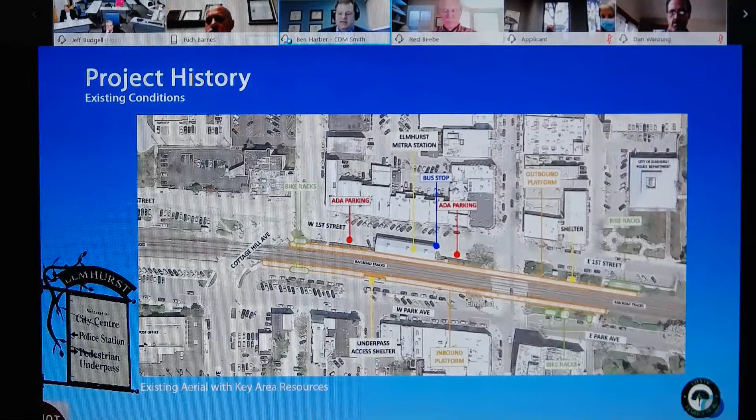Just to orientate everyone, the main inbound station that takes you into the city is the station house that everyone thinks about. There's a small pedestrian underpass that's not accessible to those with disabilities - it just has stairs. This is the location of the platform, which extends across York Street. As I mentioned, it's a very tight space, and the city over the years has tried to put as much parking as possible for commuters.

What also freed up some opportunities that I'll get into was the parking garage investments that the city has undertaken in the downtown, again over the last 30 years. That has actually created some opportunities to take a look at potentially creating more access to the site, working through some of the vehicle circulation and pedestrian circulation.

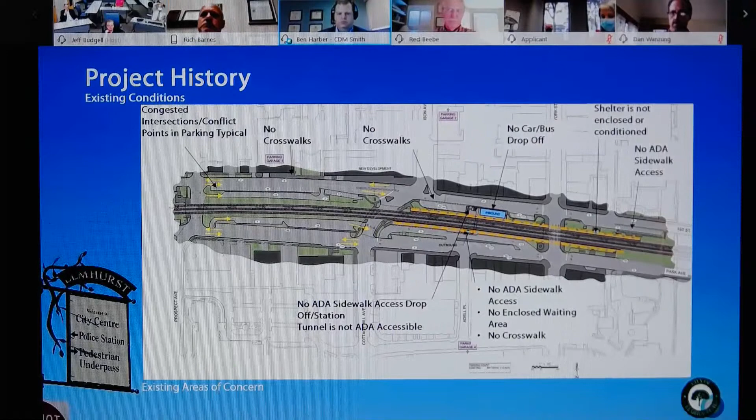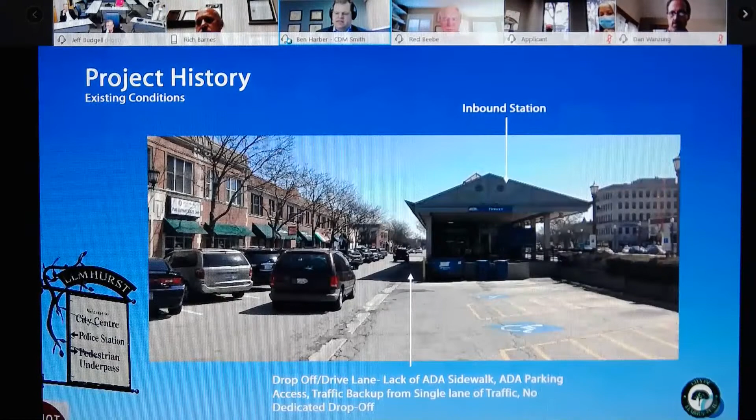Just a quick reminder, some of these images, when I saved it down, dropped a little bit of resolution - I apologize, but I think you're familiar with this. This is looking east at the main inbound station. Right now, there's not even enough space for an accessible sidewalk. And for the ADA parking spaces, there's no sidewalk, so when you get out of your car, you basically have to walk in the path of traffic to go to the station. It's just a very tight site, which is not atypical for the time the station was built.

Just a reminder, with Robert Palmer Drive, most of the vehicular traffic flow is not impeded by Union Pacific and Metra trains. But one of the biggest issues, obviously, is commuters and people using the streets just trying to connect the north and south sides of the street. So that was another issue that we wanted to address.

And then finally, on the south side, again, very similar situation. There's a lot of surface parking, people having to walk across, and there's no drop-off area. So if anyone decides to park and wait for someone here, there's no way to get around them. We've got very limited space on the south side as well.

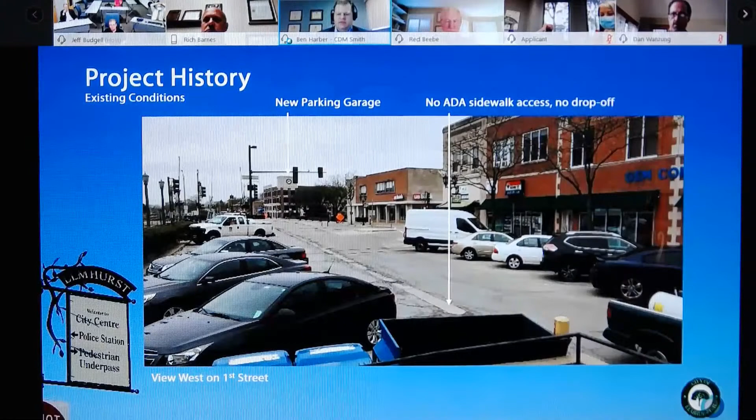As I mentioned, just a reminder that the platform extends through York Street, which is not the best condition. And we did take a look at trying to consolidate the platform either to the east or the west - I'll get into that in a moment. And just for reference, you can see how close the parking garage is, and we've got several others that are just to the north as well and the south.

In terms of the existing condition, and I think Corey and Public Works are probably more familiar than anyone else with this, that existing underpass, besides not being ADA accessible, floods on occasion. There's issues just in terms of visibility down there as well. It's very tight quarters. The existing station, a lot of the mechanical ventilation and air conditioning systems are past their useful life, and the structure was designed as a very utilitarian structure, but that's about it.

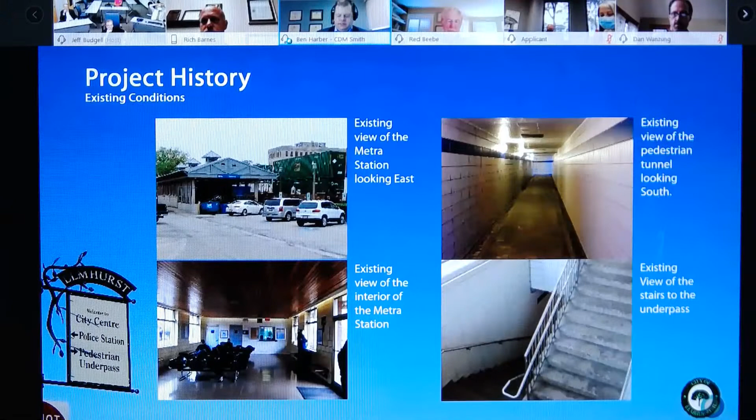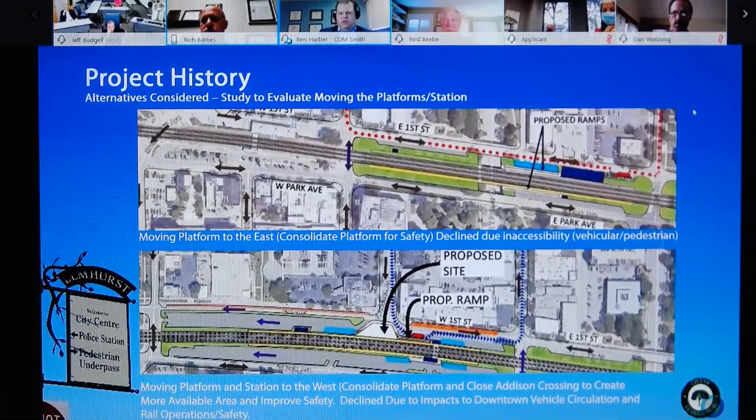Just quickly, systems of the building again date back to the 1960s, just like a house in desperate need of repair. And again, I'm sorry for the pixelation, but just wanted to show, we did look at moving the platform, for example, to the east, just as an exercise. This is York Street. And obviously, just to prove out that if we did that and moved the station further east, it would not be near the downtown business district. There'd be a lot of issues with bringing drop-off and more circulation. It's not a very easily accessible spot.

We also looked at moving the platform to the west, consolidating the platform, potentially closing off the Addison and Cottage Hill intersection. But two issues, obviously, with that. For safety reasons, you do not want to build a platform into the curve, so we had that conversation with Metra and Union Pacific. And secondly, just from a downtown access and emergency service perspective, the determination was made by the city not to pursue this option.

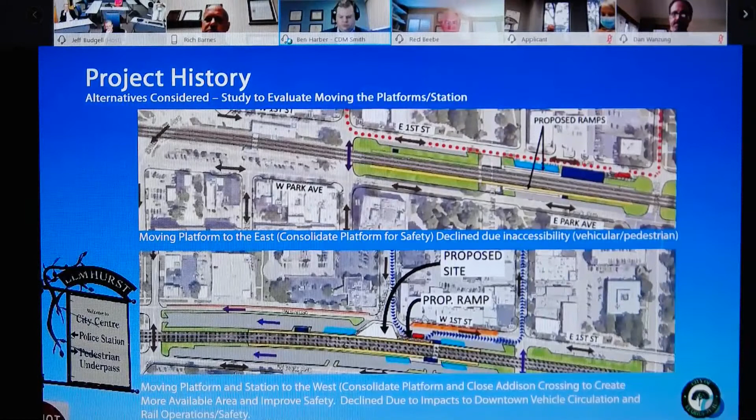The reason we wanted to go through that is it's actually a very tight space, and we can't really move things to the east and west. We just wanted to demonstrate that those parameters were really set in terms of where we could put the station.

Additionally, that mid-block underpass is really only used for commuters currently. There's no real benefit to those crossing on York.

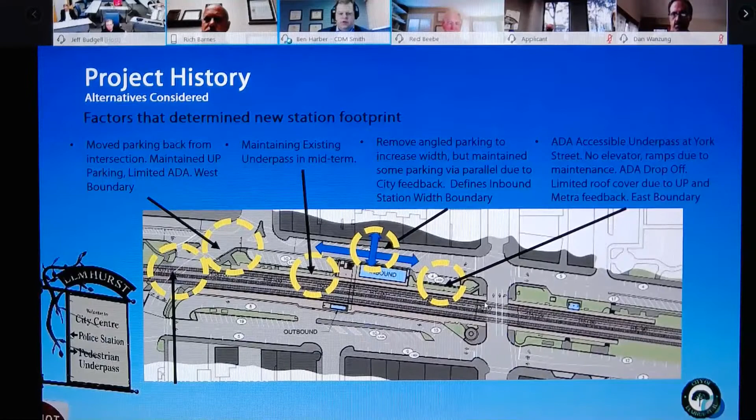So we did some quick sketches to take a look at what some of the massing could be, looking at if we put a ramp to a pedestrian underpass starting at York Street, or if we started it closer to Addison on the back end of the station.

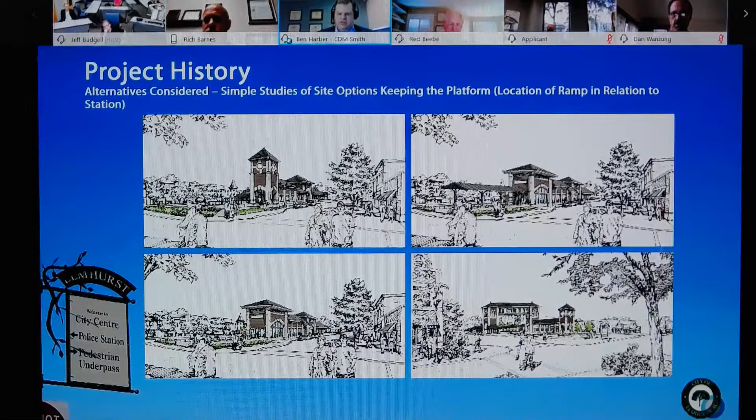We went through public comment along the way. We had several workshops with our staff at City Hall, meeting with the public. We had online surveys as well, presenting a lot of information, different alternatives, looking for feedback from commuters on how they use the station, their issues, etc.

Working with Public Works and other city staff, the determination was made that the best location for this new station would be in a very similar location, but slightly to the west. Then we'd put an ADA accessible ramp that would go from the station down to a new, wider 12-foot underpass, and be able to come up to a much larger outbound station.

We also looked at warming shelters, rearranging the parking from angled parking to some parallel parking to allow a Pace drop-off as well as for private vehicles. On the other side, we got rid of a lot of that surface parking to create a larger drop-off space and a larger plaza.

Again, it freed up a lot of real estate, getting rid of some of that paved area for more landscaped areas, allowing for more of a grandness that goes with the downtown, in our opinion.

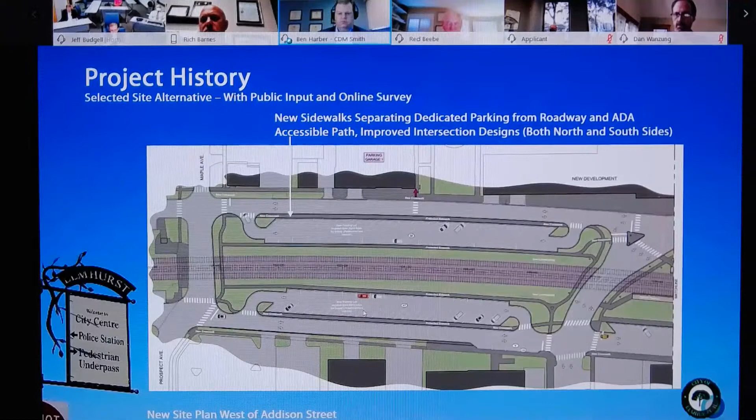Just wanted to give an example, or an enlargement, of what the downtown station would look like. This would increase the station by about 25% over its current size.

So we'd see a 24-hour waiting area, keeping a coffee shop or another vendor, and we'd have fully accessible functions. So instead of just having one unisex restroom, we'd have men, women, etc., keeping the ticket office in a larger waiting area.

On the opposite side, knowing that because of Union Pacific and Metra's operations there are many times, especially on weekends, where trains get flipped from one side to the other, we would also have a main waiting area typically on the outbound side.

The point of this is that the floor plan in relation to the ramp, because of the ramp slope for accessibility, means we have very limited space between York Street and the station building. We probably only have about 10 feet to work with on the east side.

And on the west, we need to maintain some ADA parking and some storage, so with those, we're also confined. We're very confined on the west as well.

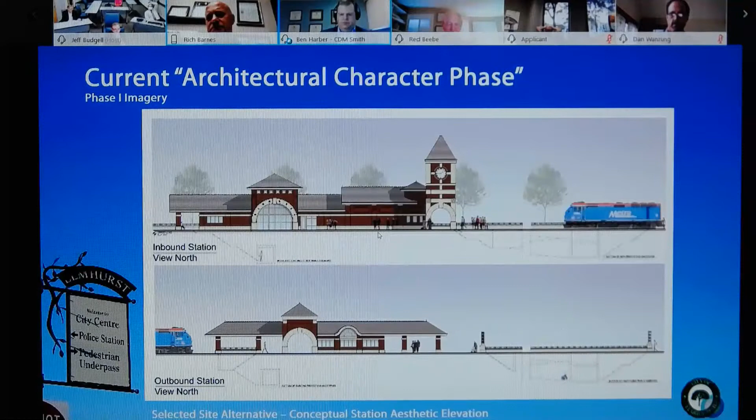This was something we had to take far enough that we could reach out for funding at the state and federal level, using some visualizations to explain that. So this is the image we used as we wrapped up phase one.

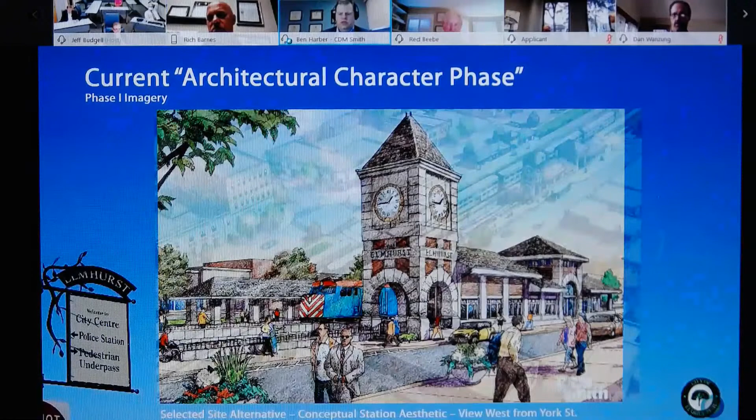And then just a diagram to show how that pedestrian underpass would look, and then the new station here, the other station on the other side, the ramp on the south side, the warming shelters, and that reworked parking.

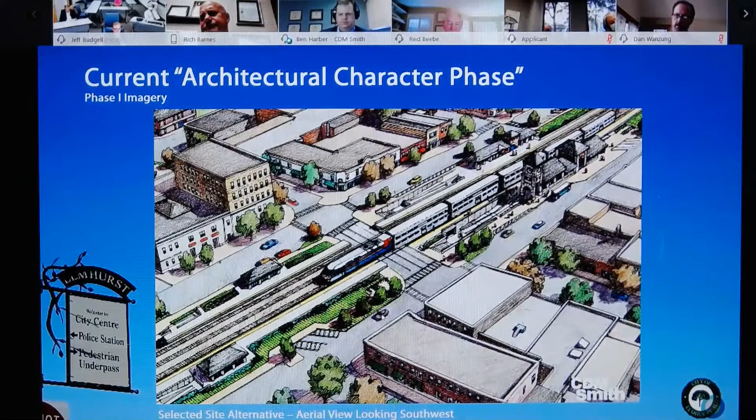Again, these are much nicer without the pixelation. But one of the things we wanted to talk about towards the end of phase one, and the city was concerned by, was that while we were showing these images for funding, the clock tower, for example.

There was a desire to engage the public even further in the second phase, and as the project got funding and moved forward into engineering, to reach out and figure out what this character would look like. So basically trying to keep the footprint of the building relatively in the same location, but really go through this exercise of different styles. What's appropriate for the downtown has changed a lot in the last 30 years.

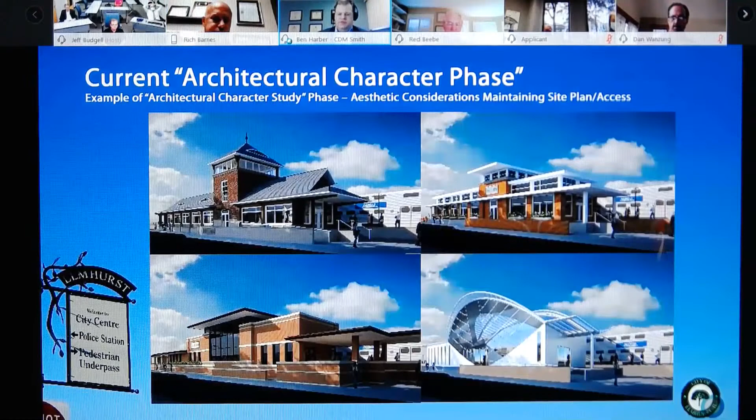During the course of the project there was a lot of development, and it continues to be a lot of development - the Opus project, for example, several condominium projects, and some commercial buildings as well. So there's quite a variety between the historic buildings and new structures, and even within the new structures a lot of diversity.

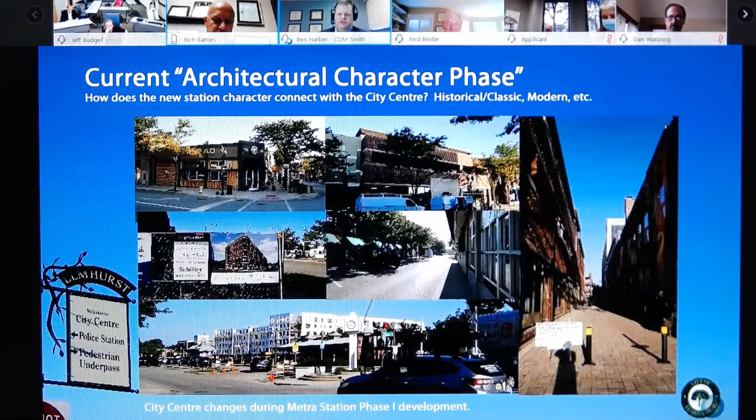So with that said, the project was successful in getting funding, and with that the city decided to move into phase 2. The first part of that is trying to determine what this architectural character is going to be, to bring in the public, and that's why we're here today.

So not only to bring everyone up to speed in terms of what has happened in the past, but also to talk about the steps we would see over the next probably 6 months in terms of that process to get to that point.

The first step we had was at the beginning of this month. We met with the city council and talked about the approach to public outreach, reminding them of the approach we saw and getting confirmation on that. The first step after that was obviously this meeting tonight, wanting to review what the steps are and an approximate timeline.

And then this fall, going through a public visioning session. We would anticipate as part of this having invites and flyers distributed online through the city website, eBlasts, and other physical locations, depending on COVID.

And then we would see doing an online survey of architectural character, looking at the proportion, the program inside the station, and not necessarily looking at renderings of the station in the context of Elmhurst, but really trying to get the public and others to think about what this new centerpiece of the downtown should look like, and what the character downtown is. So a lot of questions about visual preference is what we're anticipating.

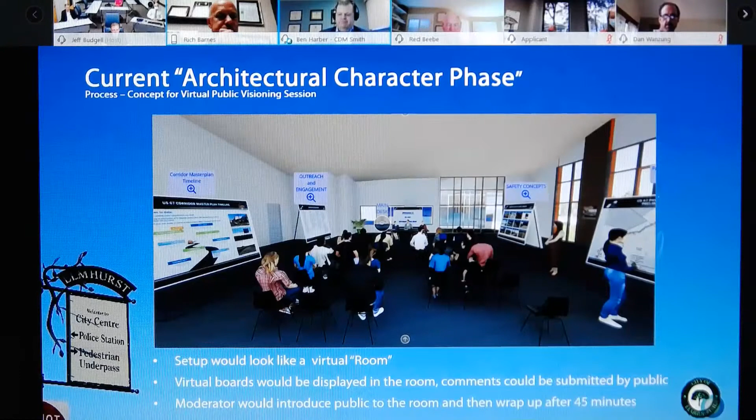Just showing an example of what we would likely see in terms of the format. We did a SurveyMonkey survey during phase 1 that was very successful, with a very high response rate. We'd see doing something very similar with the visual character. This shows a physical board idea - in this case it would become virtual, trying to get the public's input on the different character they would see as preferred styles.

Coming out of that, the next step would be another ABC Commission meeting in the fall, late fall, probably early winter. In that meeting, we would talk about the outcomes of the online survey and the workshop.

Then determine three alternatives to move forward with that the team would investigate, come back closer to late winter with renderings, 3D models, drawings, and other exhibits to get your comments. After that, do a presentation to the committee of the whole, closer to spring of 2020-21, to get final approval of the selected alternative. At that point we can turn the engineering and architecture final design teams loose, which we'd hope to do in the spring of 2021.

So I think, Ben, it all looks great, and I know a lot of work has been put into it. Could you expand a little on how, I know it's a tight area, and there's certain things that have to be done certain ways to accommodate it. But the way I see the underpass right now, a lot of people who might be running for the train or need to get to the underpass are coming from Adell Place, a street that goes south to that parking garage. The location you have it right now is over to the east.

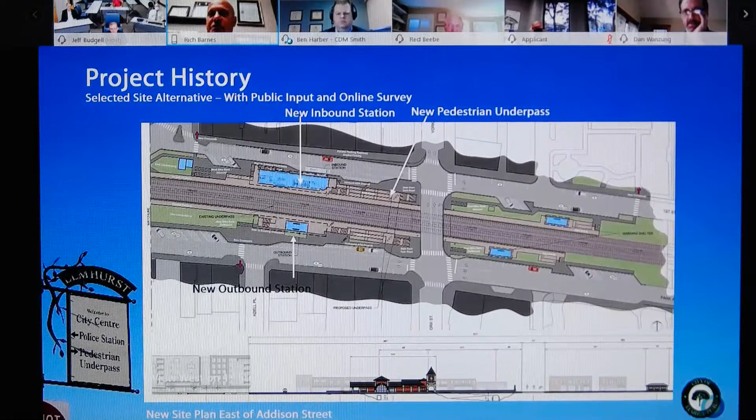And by the time they get to that, they walk down the ramp or the stairs, whatever it takes. I don't know the exact layout of it all, I can only see what you've got here, and I'm not sure which way things go. But it seems, and I'm not trying to be a smart guy, almost superfluous, because if they're going to walk that far to the east, they might as well just go to York and cross the tracks. And it takes up a lot of space.

Maybe I'm all wet on this, but I think the current location is ideal. I know you can't get the ADA to work coming straight down, and I'm totally aware you have to accommodate that. But it just seems so far out of the way for the people who would need to use it that I don't know it's going to save them any time if they're in a rush.

I'm not saying it's a good idea or a bad idea. I just know where it is now, and that's where people use it and come from to use it, and it's convenient because it's in the middle of the two blocks to get across the actual tracks. So I was just curious how that all evolved on your end, whether you're stuck with it here, or maybe that's the reason. I don't know, but I wanted to get some insight on that.

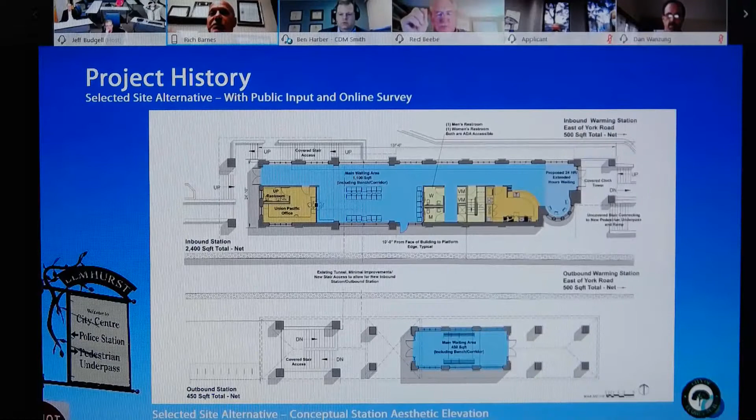I wasn't aware of that - I haven't looked into everything, and I probably should have noticed, but I didn't realize that was maintaining the existing one there. I get it, I just don't even know what the cost of that ADA ramp would be for that underpass. It seems like a huge expense in comparison to the building even. And then it has to be maintained with the weather we have in this area - it's not covered, those sorts of things. I don't know how somebody in the wintertime navigates all that in a wheelchair, but I'm just throwing it out there, and I appreciate you enlightening me on the other one still being maintained.

Thank you, Rich. Red, did you have a question?

I have a comment concerning the entire underpass situation. First of all, Ben, I want to tell you that for approximately 30 to 35 years of my professional architectural career, I was involved in public transit work - so make sure I don't get to be a pain in your butt, because I can, let me tell you. But I've dealt with this kind of thing many times. The real question I had, and this may have been dealt with previously, is I hate to see us preclude ourselves from some opportunities that might occur along with this.

I don't like underground tunnels, I don't like the ramps. I fear some of the ramps can become equal to what we see at the Oak Park station - very narrow, messy, not kept clean. Was there consideration in going overhead outside and using elevators? I know elevators are supposedly expensive, but would we build a parking structure in this town without elevators? This is a transit facility, and there's no reason not to put elevators in here unless somebody has other reasons.

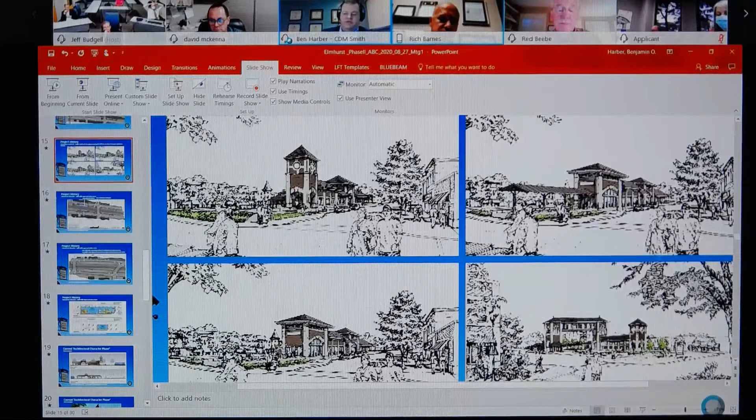So it gets into what we struggled with early - I don't want to say struggled, but part of that evaluation became it would be a very dominant factor in the downtown. We did look at the scale of that, and I know this is near impossible to see because PowerPoint had scaled everything down, but this was a study of the height in relation to some of the existing downtown buildings at that time, before Opus was built for that structure. Because even when you're up 30 feet, you've got to add at least minimum 10 feet of clearance with some roof structure. And then finally, we're going into a curve with the tracks. Sorry, if I can point this out.

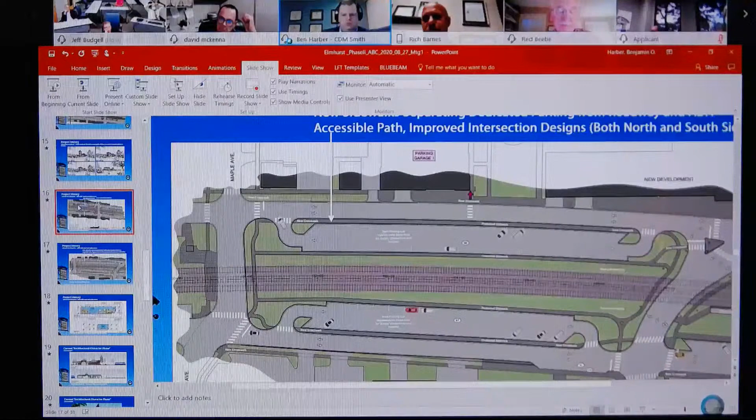Starting to go into a curve. Depending on where that structure is, another concern Union Pacific and Metra have with operating the train is if we put a tower on both sides, just talking about going up for example, because that's one of the questions. Putting a structure that tall starts to impede some of the vision for the operators. That was another concern they had, they like to see as far as possible on the platform. That train, the conductor sits up pretty high and they want to have as much visibility. I'm not going to say that was a hard no, but it was a concern at that time.

So there's kind of the downtown scale, which was a big concern. There was the visibility, there was definitely having to go with elevators, some of these other things.

The other one was long-term maintenance of that structure, because when you have an exposed bridge, an enclosed bridge, let's say it's steel, you're going to have to go through painting on a pretty regular basis, maybe a maximum of 10 years, but likely it's going to be shorter than that. You're operating above active Union Pacific tracks, so it's going to be extremely costly long-term to maintain that structure, and the responsibility would likely fall on the city. So it's a lot of talking.

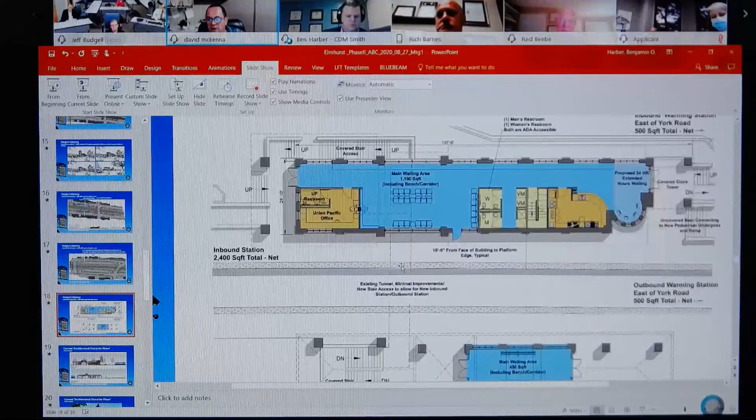One other comment I had was your page at the end there with the sharing cost grant programs and all that. I think we'd be remiss if we didn't have some sort of number in there of what Elmhurst is going to cost us residents, because I'm sure that question is going to come up in meetings going forward. Just a round number for people of what it's going to cost would be nice to put out there and make available.

Otherwise, I like everything about it. It's due. We've had that old yucky station for as long as I can remember, 52 years. It's due. I like what you've done with it.

Thanks, Steve. So the other comment about the tunnel where it's being located was not just about commuters, it's also for any resident that's walking down York Road. There's 150 trains a day that go through that intersection, so quite often you're waiting for a train to go through. To keep the fluidity going for the pedestrian in the downtown, to go from north to south or south to north, that's why there's an easy ramp, there'll be a stairwell there to go down quickly, and a wide ramp to keep pedestrians moving.

That's a good point. Thank you. Red, did you have another question? I thought I saw your hand up a minute ago.

Well, no, I would like to talk about this issue a bit more if we can, but we don't have to do it now. We could do something else at some other point. Which issue are you talking about? The ramp and elevator?

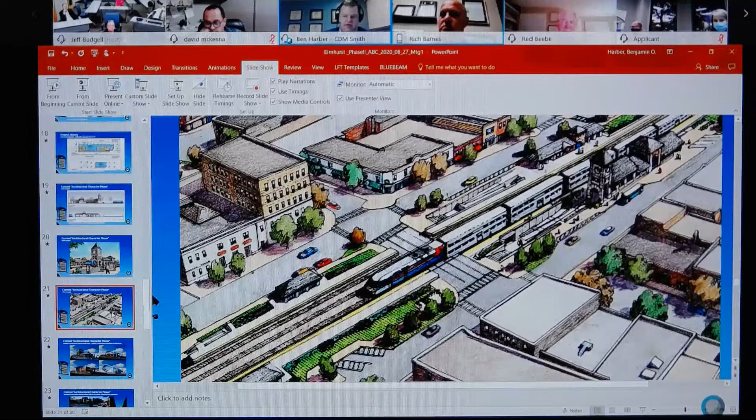Yeah, so I will say this. Graffiti can be anywhere, especially in a hidden location, whether that's the underpass itself—and Public Works can speak to some of the challenges they've had even with just the existing situation. I've seen it on the interior of elevators, some other nasty things on the inside of elevators, and on the concrete walls. One thing I will say, that is obviously a concern. You want to bring as much natural light in.

So instead of just having the ADA ramp going from the station down with a turn back, we also saw having the stair full width is what we're proposing right now. That would be at least 10 feet, if not more, wide. When you're doing that and having this whole area exposed, the point would be that this should be very visible from above, more so than an enclosed area. So I'm not going to say it's perfect—a lot of it's going to be trying to mitigate that as much as possible with materials, coatings, and things. But we all know that's not going to be 100%. Nothing's going to be 100%. So at that point, it just becomes trying to mitigate it, trying to keep it as open and visible as possible. We're trying to maximize that tunnel, the pedestrian underpass, with a 12-foot diameter, which is significantly wider than there is today. So all of those are strategies we're trying to employ.

I did want to, I don't want to take away from anybody else's comments or time, but back to one of the comments made about others using it—the other benefit is capacity. So not only if the train is stopped, which sometimes happens during events, for example, but we also have a lot of cases with people with strollers and bikes and things like that when those are closed off. I've seen that out there, and it's another option at least. But that's where I'll stop.

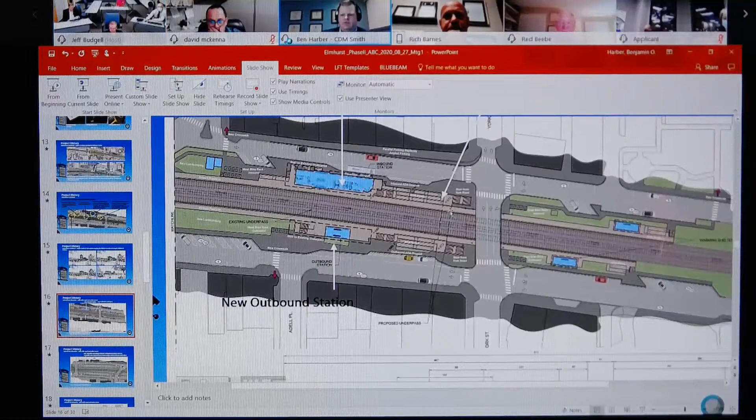So that concludes the Metra Station presentation. We'll move on then to the next item on the agenda, which is 126 South York Road facade grant.

Do you have that, or can we get it up? Can we do that right now? I didn't want to do the case today. Is there a presentation here to do that? Yes, both groups are downstairs. Emily, you have both groups down there, correct? I would, yes I do. I would invite them to present anything they want to present. That'd be welcome. Do you want us to pull up anything on the screen, or are you just going to speak? You can just... No, I was. Okay, yeah, yeah, sounds good. Thank you.

Am I muted? No. Nope, you're all good to go. All right.

In speaking with Bruce, he said you had all the drawings and information, is that correct? I believe that is correct, yes, I think we all delivered that. Okay, so I'll make my comments very brief. 126 South York Road has just been a rundown, small one-story building. We're building an office building there that I'm going to move my office into. I'm currently at 105 South Adell. Grew up in Elmhurst, went to York High School, still have my home in Elmhurst. Just my whole life been connected with Elmhurst. I want to stay in Elmhurst. I'm moving my office into 126 South York Road.